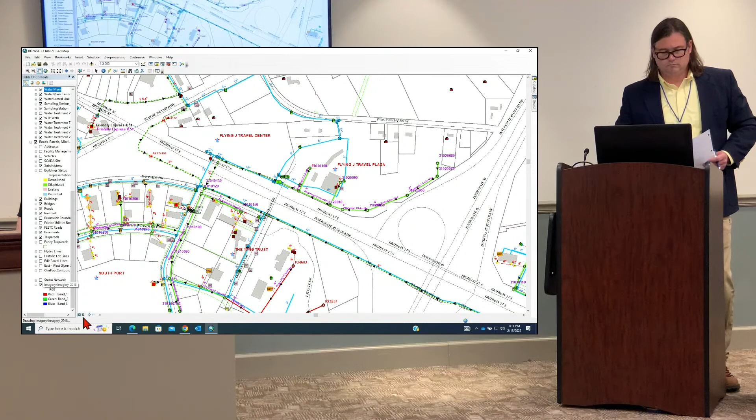The problem is, if you're familiar with that area, it is very wet right there, so they're gonna have to bring in matting and do some significant traffic control because the entrance to the Flying J is right there as well. Typically we handle these without having to bring it to you because they usually don't get above the $25,000 limit, but this one came in at $36,496.18, and that is the cost for Georgia Power to provide the new service.

Where's the pump station? Right there in the corner. Oh okay, there it is. Yeah, how's it behind the locked door? I missed that part. It's fed off of a maintenance building adjacent that is owned by Flying J.

So when the travel center was built, they ran the service from the travel center, and it does not have a dedicated line for that. It's all run through the same feed, and there's something wrong with the feeders in between the station and the travel center. And Georgia Power doesn't have an easement for that?

Where is the pump station owned by? Right there where the arrow is. See where he's doing the arrow? Yeah, zoom in.

But Georgia Power doesn't have an easement for their own lines? Georgia Power doesn't own that line. They don't, okay, that's owned by Pilot Flying J. We technically don't pay a power bill on it because it's all going through Flying J right now. Once we do this, we'll start taking over our own power bill, but we'll also have a lot more control about what we can do there, which is important.

So are we paying Flying J anything right now? Do they know that? It is what it is. This is what it is at this point.

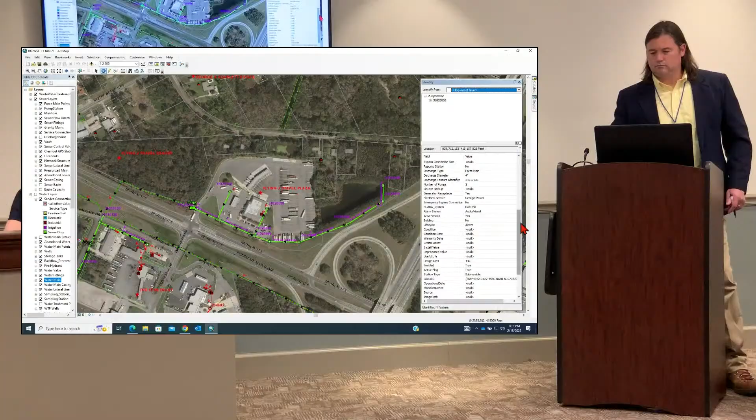You'll see that the gravity's actually been extended past Flying J, so that we could eventually one day serve those back areas if anything came in on that side. But is Flying J paying the full rate that any other person would pay? Yes, they're not getting a discount because they've got private infrastructure. They pay full amount, but basically it's only serving them right now. It has open capacity, and the gravity's already been extended so we could extend to serve more people.

This is one of the few stations we've got in our system that was actually planned for future growth. So where's the electrical line gotta come from? The other side of Highway 17, it's gonna be bored underneath right there.

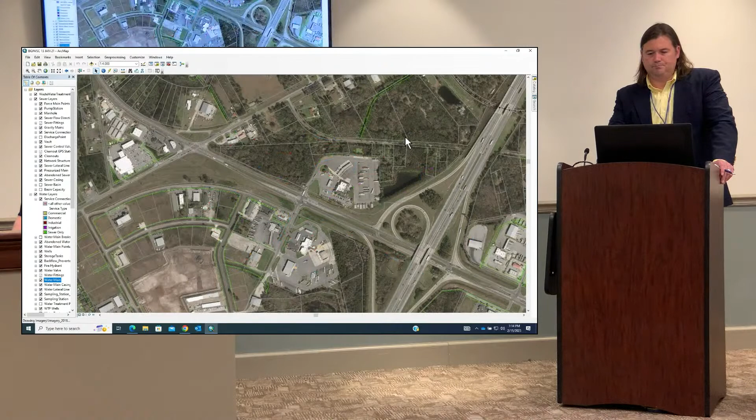A little off subject, but that green line there, that's our infrastructure. Is the dashed green line force main, the only thing in the area? There's water in there as well, he's got the water layer turned on. So all that neighborhood at the end of that gravity line, zoom out a little bit more so we can see north of there. None of that back area currently has sewer or water.

That's not a trailer park, but an RV park is back there, that's all private. The portion that's being expanded will be coming to our system, they're fixing to basically duplicate what they've got there now. Oh, I'm looking at the road wrong, I'm sorry, I'm looking at the interstate as if that's it.

It's 303 Parkway there. Got you, I'm looking at the wrong road. So the portion of the RV park that's currently not served by us, the new portion will be served. They'll go to that pump station in Majestic Oaks. I was looking at the wrong road there, I was looking at 95 as if it was Blythe Island.

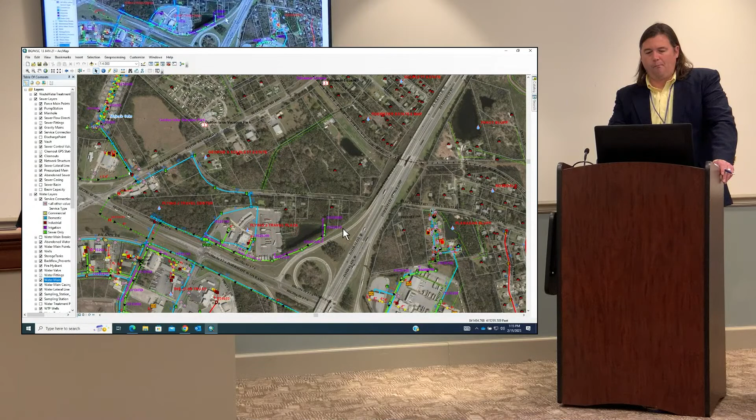Long-term, there are benefits to us extending lines onto Blythe Island, because right now that is the extent of the lines we have on Blythe Island. So we're gonna have to start paying for that? We're getting money from it, that's right.

It surprises me that Georgia Power, I understand because the way they're doing it, they say this is what the ratio costs, referring to what they believe they'd get back over time. But it seems like for public infrastructure like this, they wouldn't have a choice but to feed it, even if it's over ratio. They'll feed it, but I don't think we're generating enough usage for them there, because we do have the option of trying to fix what's already there. They already have service to the Flying J.

We could do that, but looking at it from staff's perspective, we'd rather have dedicated service. We've done several of these in the past 5 years where we have not had dedicated service, and we've changed to dedicated service. Typically it's $10,000 to $15,000 to get it done, but given the high traffic and water everything that's going in there, this one's just more expensive.

Do we have other analogous situations where the pump station is paying and it's only serving one client? Yes, well, one client is one neighborhood. And we own pump stations on the port property that's only serving the port. Are they paying the power bill for those? Each situation's different, I'm just looking at making sure we're equitable across the system.

At this point I just want to make sure we're not setting the standard that every single private pump station - it sounds like this one's already been deeded to us as a moot point, but every little residence has a little bitty pump station, we're not like, oh, we'll pay that. We typically do not accept pump stations that only serve one customer.

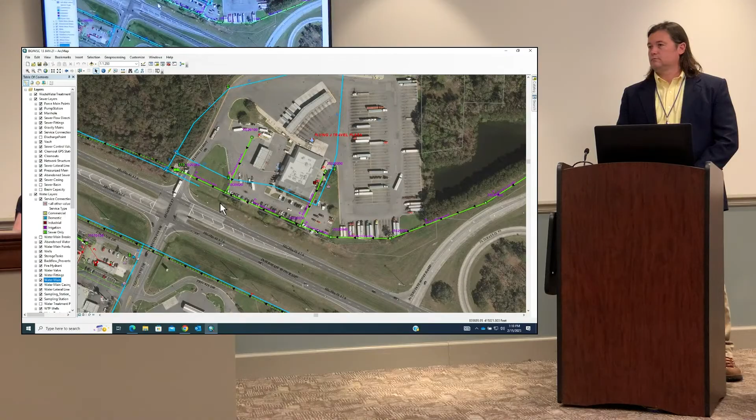Where's the breakout on the map? We don't know, we just know it's somewhere in between the station and the Flying J. Which is where? Where's the maintenance building you referred to? That's the big building. I'm not sure where their maintenance building is. Operations would know where that is. I honestly do not know where their maintenance building is. I think they have to go and check the panel and all that kind of stuff on occasion.

If it's locked, they're out of luck. We have, in storm situations before, had issues where we had to wait extended periods of time for someone to come in and open doors for us to do things. Now, luckily, that station doesn't have a ton of flow on it, so it hasn't been a problem, but it's highly inconvenient as well.

But you also could just set a disconnect on the property and that could be your isolation source, instead of having to deal with them every time. You could just put a disconnect on the property. And yes, that's one of the things, a lot of our stations, when they were constructed, do not have main disconnects at the station.

All of the stations we are rehabbing are getting main disconnects installed at the station. And I think that'd be worth going back and looking at. I mean, candidly, maybe a better use of funds is making sure that we do have main disconnects, so that our employees... because the last thing we want is have an employee who goes out there and says, I really should isolate this, but that's going to be a pain in the butt, it's going to cost money, it's going to cost time, it's going to make me late getting home.

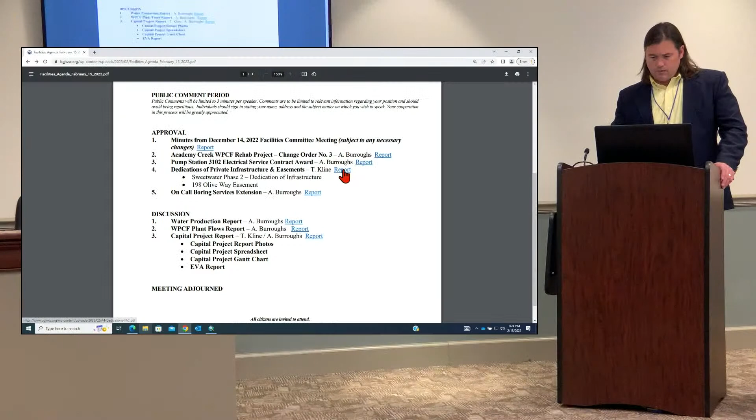Let's go to the memo here. This is the agenda item where the second, or additional, two easements were added. There's heavy graphics involved. There are two separate items to consider, and I'll walk through these two items individually here.

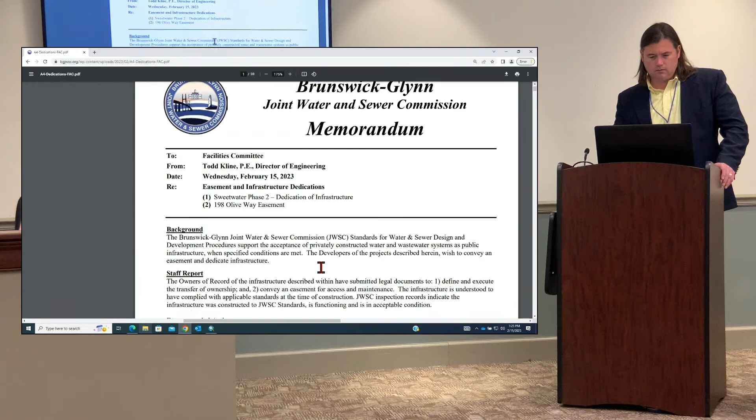First is Sweetwater Phase 2, which is dedication of infrastructure. Within the memo itself there's a location map, or vicinity map, and also a snapshot from GIS. Typically we'll highlight the areas of interest we're talking about, and the actual documents, whether dedication documents, easement plats, or record drawings, are attached as exhibits on the back side, so you should have all those materials in your packets. The first one here is Sweetwater, on the north end of Glynn County.

Zoom into that guy there.

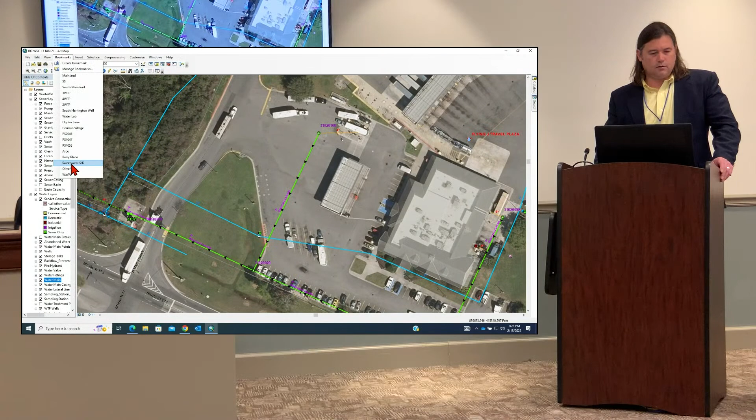Just north of the former Coastal Pines Golf Course off of Golden Isles Parkway is the subdivision of Sweetwater. They've been doing some extensions and build out of that subdivision, and as part of that, they installed a little bit of new gravity sewer.

You can see the sections highlighted on the GIS map there, and if you've got the handouts, you might have to skip around through here a little bit. This is basically a recent development - all the infrastructure's in, we've inspected it, and we're ready to turn it over. We've performed testing, manhole inspection, CCTV, the whole nine yards.

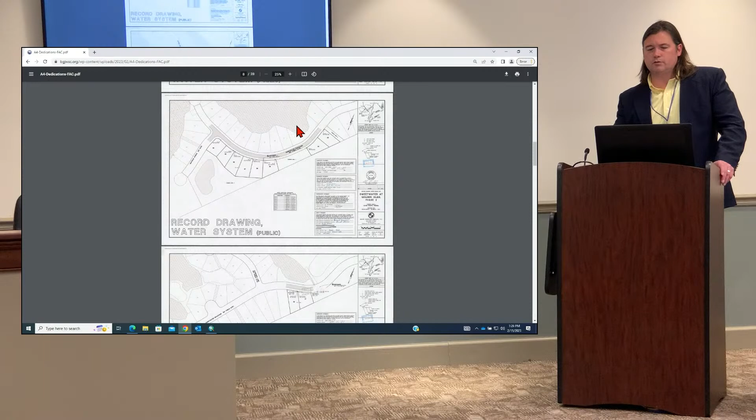Do you want to take these as one approval? One approval motion, unless there's a reason y'all don't want to approve it. Correct. Okay, alright, moving along.

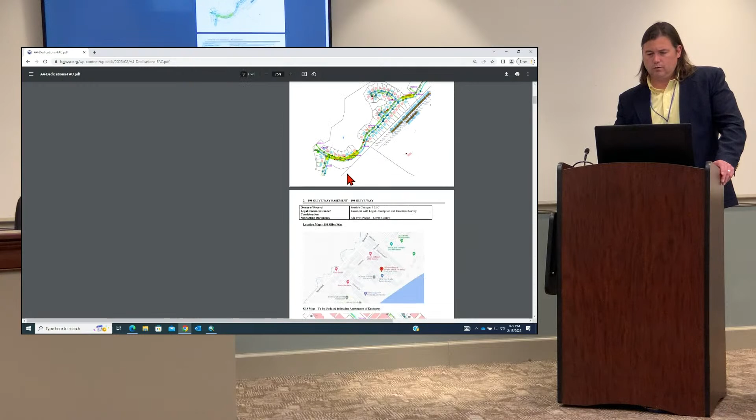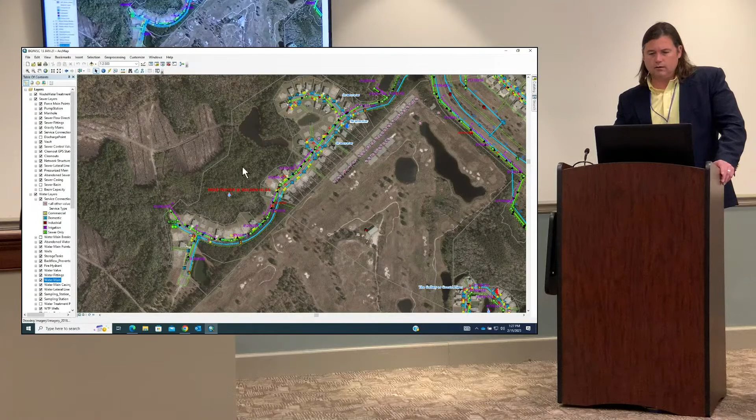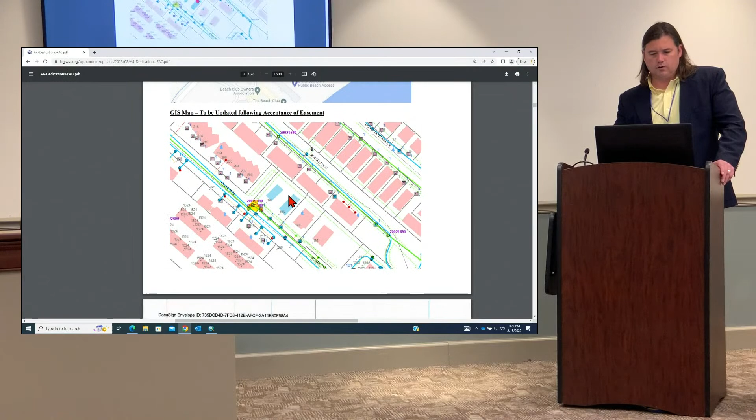The second one here is Olive Way, which had to do with an abandonment. Sometimes property owners will petition Glynn County or the city for an abandonment of public right-of-way for various reasons. In this case, the public right-of-way contained a segment of gravity sewer that we need to remain there and have access to in perpetuity. So what we requested from the applicant doing the abandonment is to dedicate a joint water and sewer easement, and that's exactly what they did.

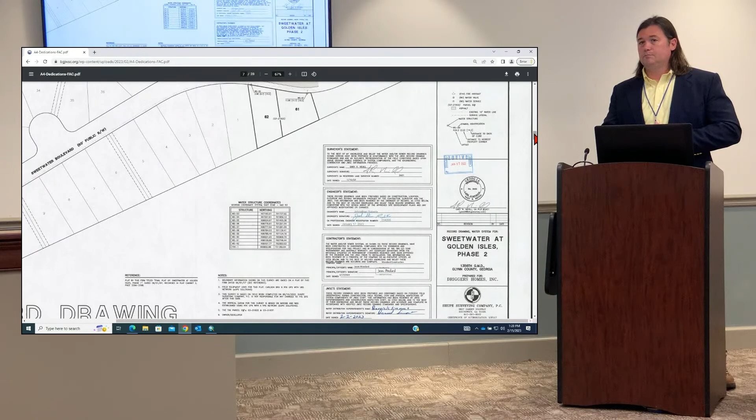So when you've got something that is public and then all of a sudden they're making it private, but we're wanting to keep a portion of it public, are we having to pay for that, or does the applicant have to pay for all of the costs associated with that? The applicant will pay for all the surveying costs, anything to do with that. Now, we will have associated legal review costs with the joint water easement, staff costs to review these applications. We've had people do abandonments and actually pay to move our asset out of their abandoned right-of-way, and that's on their dime.

I would think that we need to work with the county - if the county is abandoning property and basically just giving it away, since they're not buying it from the county, they're getting it for free, then all of a sudden Joint Water Sewer's got to pay to give somebody free land. I think we need to work with the county so that if they abandon something with our infrastructure under it, the person getting that property needs to pay all associated costs, maybe even including our fees, such as a fee to Joint Water Sewer.

We do have a review fee for it - it's nominal, I think around $100. I'm not trying to get rich off of it, I just want to make sure we're covering our costs, because ultimately it's a cost, and there's no point in the rest of the ratepayers paying for somebody else to get free land.

That is true, but legal's time could be significant, because they will review it to make sure everything's straight. We're paying Charlie's team for that. I think that needs to be part of the homeowner or property owner's responsibility. We could certainly look at our fee for what one of these abandonments costs us to review, and include an estimate of legal fees associated with that as a portion of the review fee.

Okay, that is the second one. That's my two cents. Oh yeah, sorry. Yep, okay, if we're ready, we'll move along to the next one.

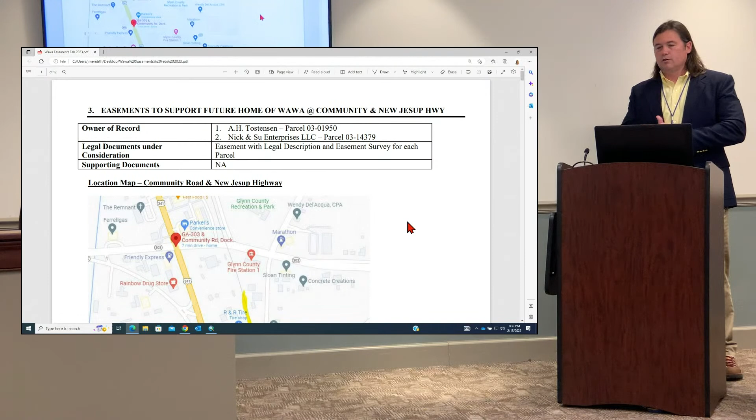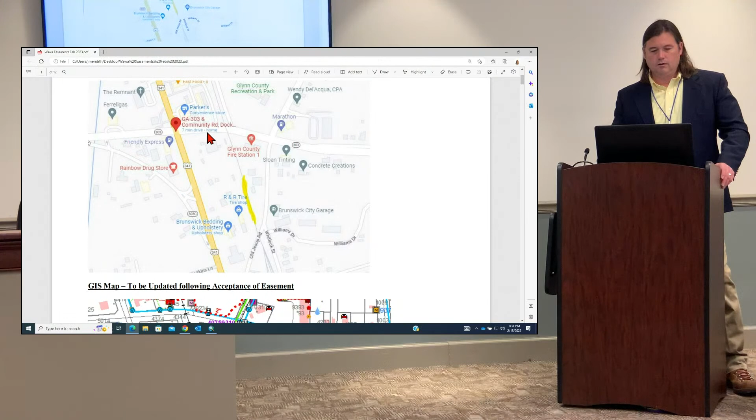They have to traverse two other properties, so they got together with those property owners and are deeding easements, or hope to deed easements, to the Joint Water Sewer Commission to facilitate that. It's at 303 and Community Road, catty corner to the old pumpkin patch. Here's a GIS map of the area where the gas station is proposed, and the easements come down the right side of the adjacent properties to get to our system to discharge at this manhole.

I'll jump over to GIS.

This is for the gravity sewer, with a force main from their pump station on site. They're going to have a privately owned and maintained grinder station to serve their facility, since gravity isn't deep enough to serve it. So their option was limited to pumping, which is how they'll convey their wastewater down the right side of their neighbor's properties.

What size is the force main? Two-inch. Anybody else ever tie into that force main? Yes, sir, absolutely. That's one of the reasons we encourage them to deed that to us. Once the force main exits their property, it becomes Joint Water Sewer Commission property, so any new customers can tie onto it. That's typically the process, and also why we are requesting the easements to be public.

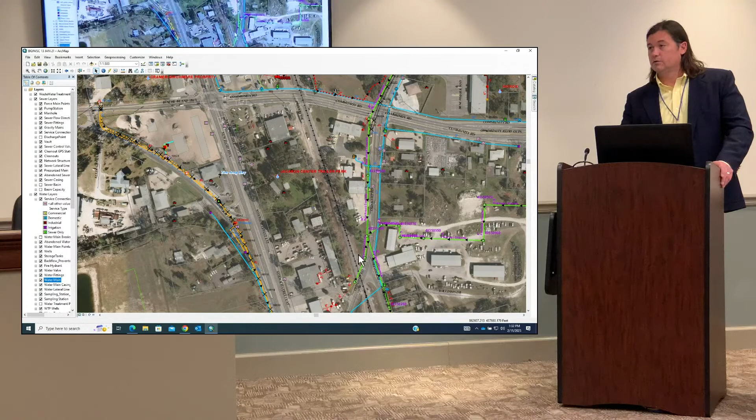We did 341 up there at Community Road and the Friendly Express. Didn't we put in a 4-inch force main then? An 8-inch, I thought... I thought it was 4-inch. No, 6 right here. I know we paid the difference to increase the size of the force main from what was necessary for the Friendly Express to tie on. That's right, we pushed it across 303, didn't we? It's across 303, yes.

Should we do the same thing here? A 2-inch line will presumably carry enough flow to accommodate whatever would be developed on these couple of lots. Zoom out.

Now, water will be brought under Community Road up here to serve this project, so there's already water right there. Go to the north. In theory, if we wanted to extend something, you would extend off of this gravity system that's already coming off of Old Jessup, that green line, and then branch off in that direction.

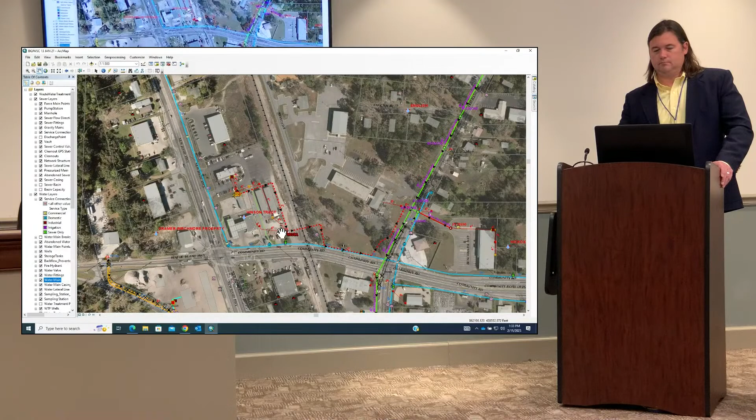So that Hardee's there, that's not a Friendly, it's Parker's, and that Parker's and the Dollar General are all on private grinder stations, pumping through that red dash line to our gravity system up there on Old Jessup across from the Ballard Center. So that Hardee's and that Parker's are grinding their own stuff and pumping it down that little section of 303 across the county's property into our system.

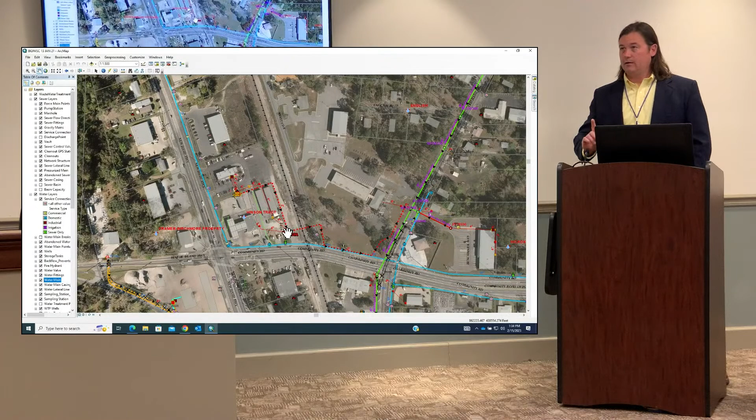Also note, we have a satellite agreement, which clarifies—by Glynn County ordinance, satellite agreements are required when there's an owner of private infrastructure that discharges to our system. Sometimes those are challenges, but we require them with every project that has associated private infrastructure, especially when it's shared amongst adjacent properties. So what's that Dollar General doing? They've got a septic tank.

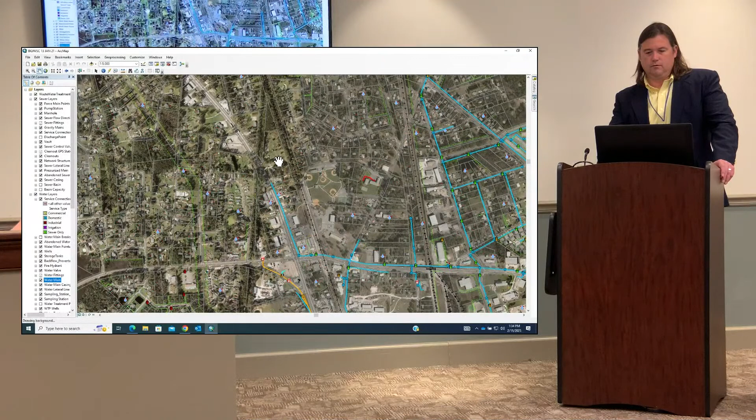What do—turn the pictures off. It looks like a red fitting. It'll look less... oh yeah, I see it now, okay, wow. That might help, all those little red things on there. Those are all septic? All these guys, okay, those are all septic tanks.

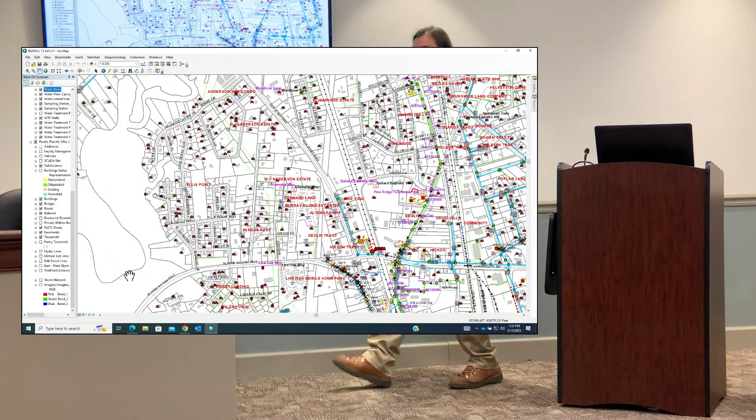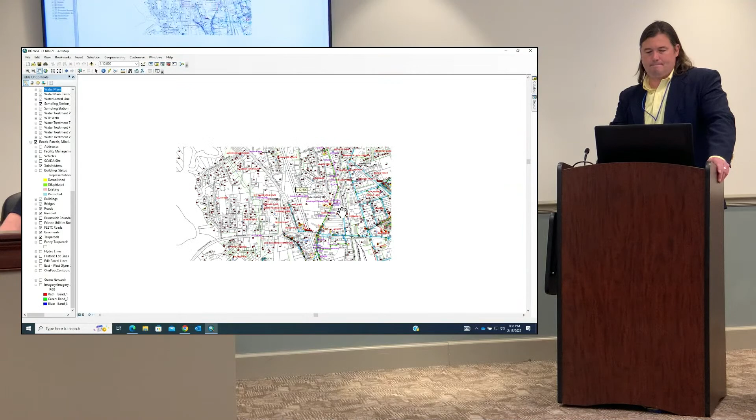That indicates it, and shows where we did the study to evaluate the feasibility of that. We had a study done right there from those neighborhoods. But it went on the other side of 341 too, a little bit, didn't it? Yeah, we did this between Old Jessup and 341 up to the canal up there, and also looked at what it would cost to do that. There's not a lot of density in there, but we also had a survey done, and there was limited interest.

And this developer is paying that portion for the easements. Except for staff review, there's a nominal fee, but that's for new business — I don't see an issue with that, totally separate from the point I was making a minute ago. In other words, there's no gain for joint water and sewer, no gain for our ratepayers, but there are additional customers and additional public health benefits.

And the line comes down south to tie in, right? Yes, we'll tie into a manhole right there near the railroad right of way. They will tie into this manhole here. Right, that all makes sense to me.

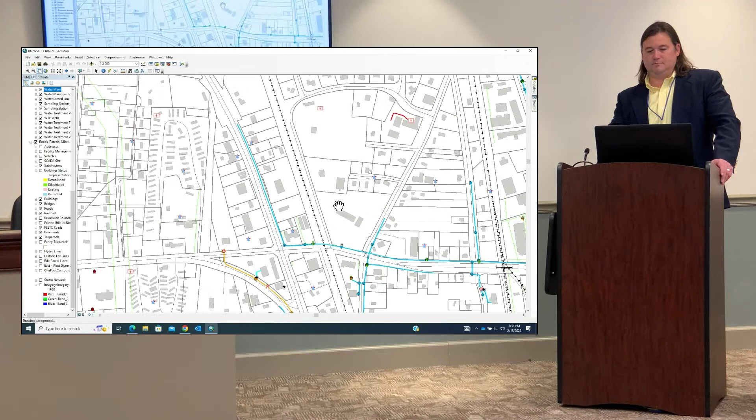Mr. Chairman, if you're ready, I'll move the facility committee recommend the full commission approve and accept these projects with associated dedicated easements, unless another commissioner wants to pull one of the three projects out. I'll second the motion. There's a motion and second. All in favor? Motion carries 3-0. Thank you.

Next item is on-call boring services extension. Mr. Burris — yes sir, back in August we were granted approval for a contract award to DNC Directional Boring LLC for on-call boring services for water main installations. That was in effect for six months as a trial period to see how it goes. We're at the end of that six-month period, and both parties are very pleased with the success of the project to date. DNC has agreed to hold their pricing where it's been for the past six months and extend this for an additional six-month period. The request today is simply to extend the existing contract six more months.

We've used this to do a lot of work in St. Clair subdivision on the island, Menendez and Rivera — El Dorado — another subdivision on the island, and some work on the mainland in smaller sections. Instead of having to open-cut and dig all these two-inch galvanized lines, most of what we have bored is two-inch lines. We're also going to use this contract, already awarded, to replace the lines in Wesley Oak Circle, a neighborhood on St. Simons, up to eight-inch lines in a couple of those areas. So this is a very effective tool for us, and we'd like to extend it six more months.

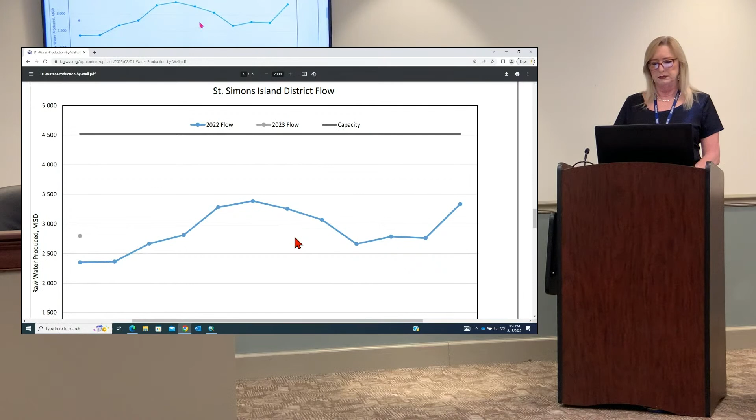But one thing to note, if you look at the graph, last year in January versus this year, we have substantially more water usage in the month of January for St. Simons, 2023 versus 2022. We have seen some customer growth over there, but not enough to explain that big of a difference in water usage. And this is measured at the well sites, not the meter sites, so I'm a little curious if we might have had a metering issue back last January for the number to be that low.

And then at exit 29 at the South Mainland, there's 3 wells down there. Commissioner Stevens, like we said on the Canal Road well, exit 29 well is the same situation. It is not a current production facility. There's a SPLOST project that will convert that into a production facility. But it was 275,000 gallons a day at exit 29 for the month of January, very much in line with where we are month to month down there.

But when we convert these from fire wells to regular wells, are we using like the Ridgewood model kind of thing? Yeah, I mean, with every project, you learn new things that you want to change. So Ridgewood is kind of what we're basing it off of, with some tweaks that we think might need to happen with maybe the way the building and piping is being laid out. But yes, very similar to what we've done in the other areas. It's an attractive facility, and all the operations staff like having the same thing in every place because it makes their life easier as well.

What's the status of the plans on the Canal Road well? We're going to touch on that in the report as well, Commissioner. We're waiting on a couple things before we advertise, the final opinion of costs from the engineer, and then also I believe we're still waiting on the EPD to come back.

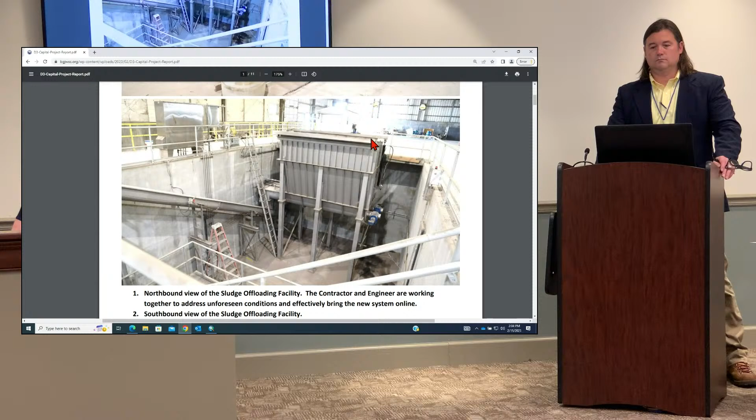No, that hasn't been started up yet. So nothing's been started up there. Right, so the lid, what's been the major holdup was that this lid up here, which technically wasn't required by the contract, but they decided they were going to put it in force anyway. So that lid was not able to function as intended, so they were bringing in additional hydraulic rams to extend it out further.

Well, the first time they sent 2 hydraulic rams down here, they sent them with different stroke lengths, and you can't open a lid in the same direction if they don't extend the same stroke length. So they brought in and got some new ones installed, tried to do startup last week, having some issues they're trying to work through now. I was hoping to report today that that had been started up. It will work in manual, it will not work in automatic right now, so we're working through those issues.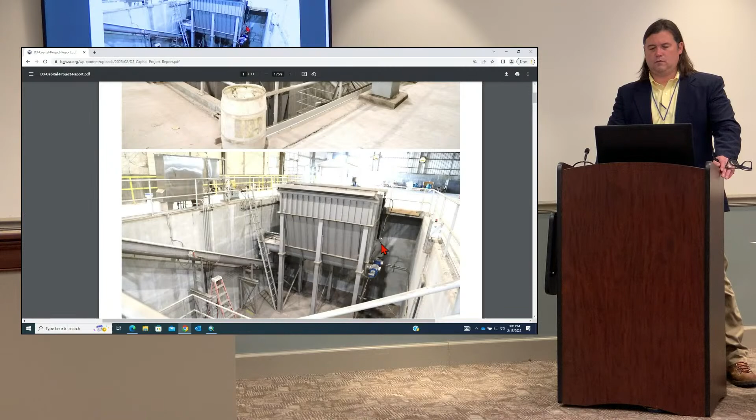But we did take a dump truck that we have, threw some sludge in there just to be safe, and it will run in manual right now.

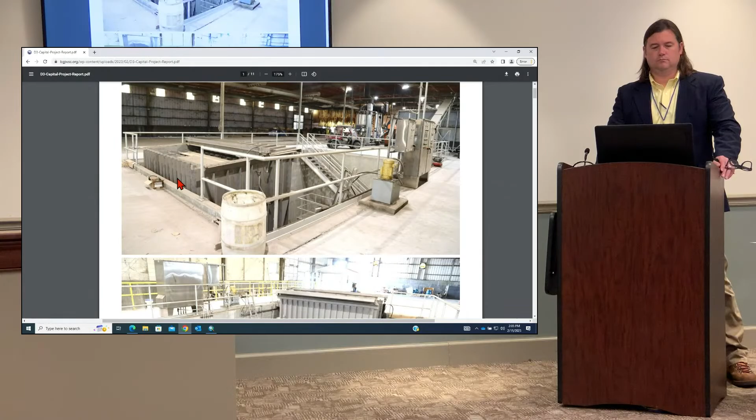Does there need to be a chain or some kind of additional protection around the left side of the plant, west side of the? That's all gonna be redone. That thing's got to be lowered, that whole thing's gotta be redone from a design perspective. Looks like there's a gap there, somebody will walk. There is, and that will be corrected as part of the design changes. That'll have to be paid for by the design professional.

Maybe just a plastic yellow chain. Yeah, we'll put something up there. Yes.

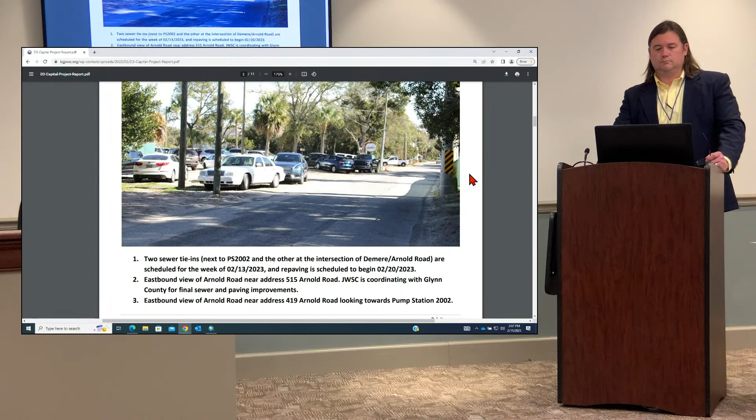Okay, next project is the Arco Area Water and Sewer Extension Project. I would say we're over 30% complete with that project now.

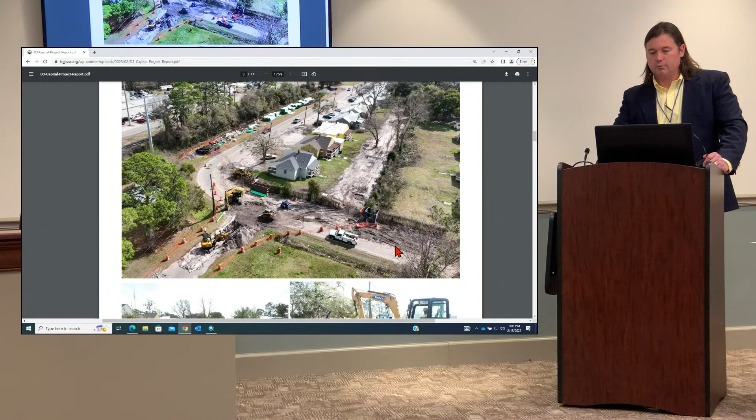So it's a fantastic opportunity for these folks. And then also on the other side, these folks will be connecting as well, just outside of the picture. And we're finding a lot of interest about the septic tanks, right? Yes, sir, we are. I think the septic systems in that area had served their time and were very tired, so it's a timely connection to the public system. This exhibits the contractor a little bit further along than this picture from when it was taken, which you can see some activity going on there, a lot of hands on deck with UWS, our prime contractor.

Bottom picture shows another shot up the easement behind the homes there, and some pipe going into the ground. Pretty typical of what you see on site.

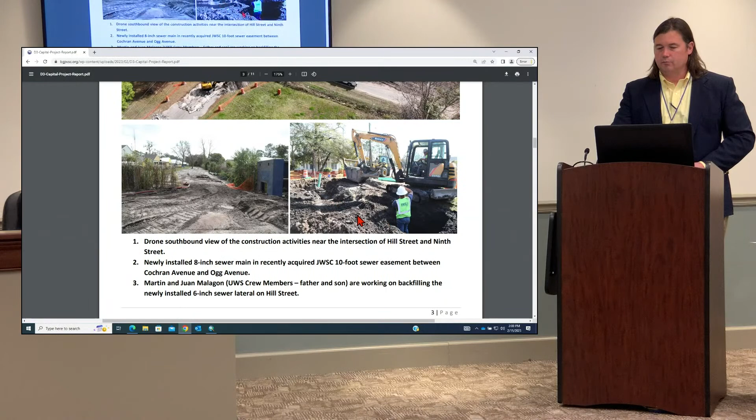What percent are we through on that? I would estimate 30 to 35%.

It's a little bit more than we have listed up here on the title bar. We got some renewed production going on now after the first year. In fact, right now on site they're having their bi-weekly project meeting between the engineer of record, our staff, and the contractor. That's 2 o'clock every other Wednesday.

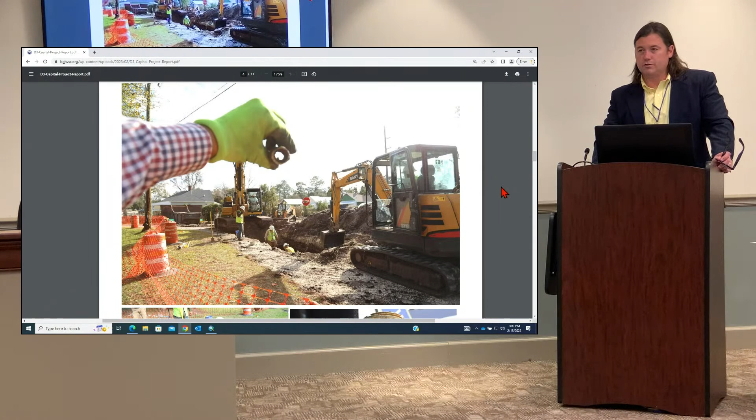Galvanized replacements, ongoing project here with in-house forces and that horizontal drilling contract, which candidly from operations, they really enjoy having that tool at their disposal.

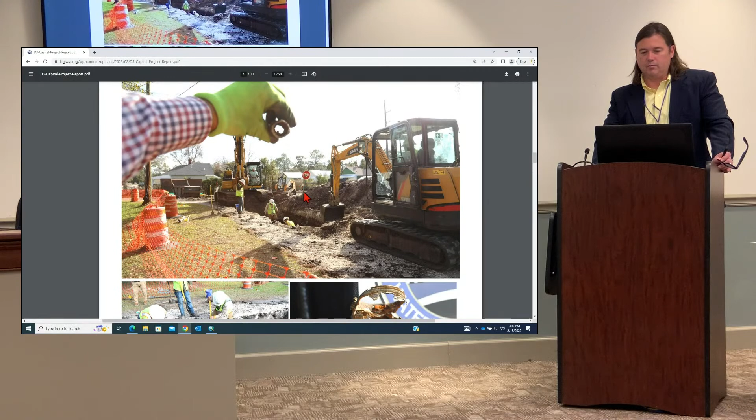So you can see here, this is Jason taking a picture of his hand, holding a piece of galvanized pipe here that exhibits why it needs to be replaced. Tuberculation, you can kind of see in there. Down the bottom two shots, you see the guys in action doing a repair, with the new poly tubing going in for a service line. That's the blue 1-inch poly tubing. And that bottom right picture shows a typical piece of metallic coming out of the ground.

That's amazing. It's something else. You can see how thin that is. That was just a galvanized nipple there.

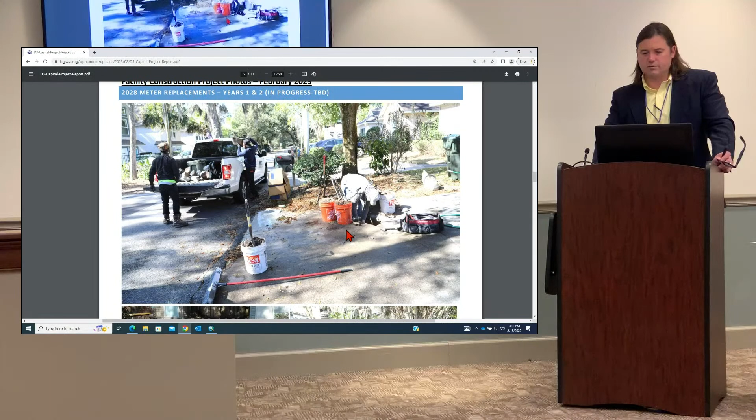Moving along, meter replacements. In progress still, and I think around 19,000 plus meters. Is that correct?

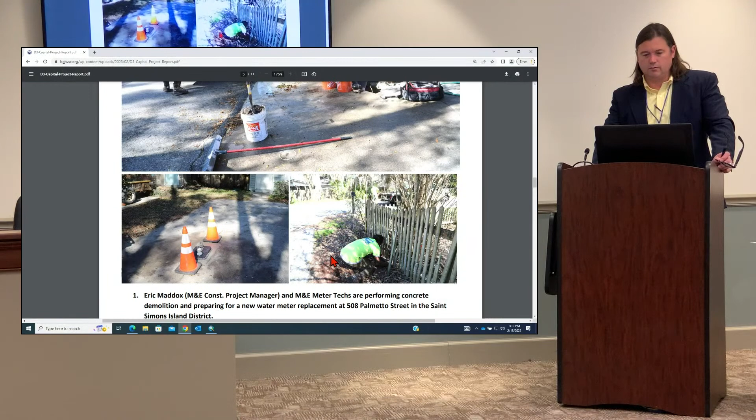Some good pictures of the M&E folks in action, and it's pretty impressive how fast they move with these swap outs. They have a system down: pull the lids, drill them, put the new antennas in there, and get them reinstalled back in service quickly.

Do we have enough meters to complete the project from what we've already received? Yes, sir.

I know we got them early because the price was going up. What's the value on those? Are we able to flip them? Any extras we could sell off? No, no extras. I know a guy. Know a guy.

Very quick moving project there. I'll just note, for every new meter that goes in the ground, we're working with M&E to take survey grade GPS shots of those meters. So with every new meter that goes in the ground, our mapping gets improved, which helps when we have to go out and locate a meter.

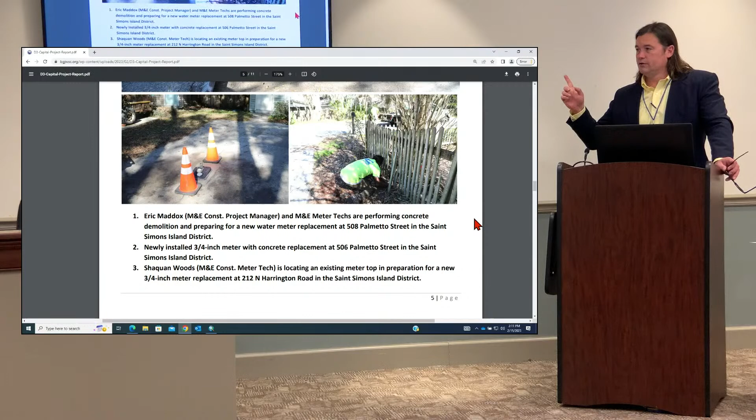Did we find that meter in the marsh yet? We've got several we're showing in the marsh. They previously had them GPS'd, did a drive-by GPS type thing, and tried to pick up the meters, and one of them apparently is floating out there in the marsh. Obviously there's no meter in the marsh, but there's a point out there.

Is this project going to come in under budget? That's the hope, yes, sir. We still have about another 8 to 10 months worth of field installations though, so we'll keep our fingers crossed and certainly stay cognizant of that question.

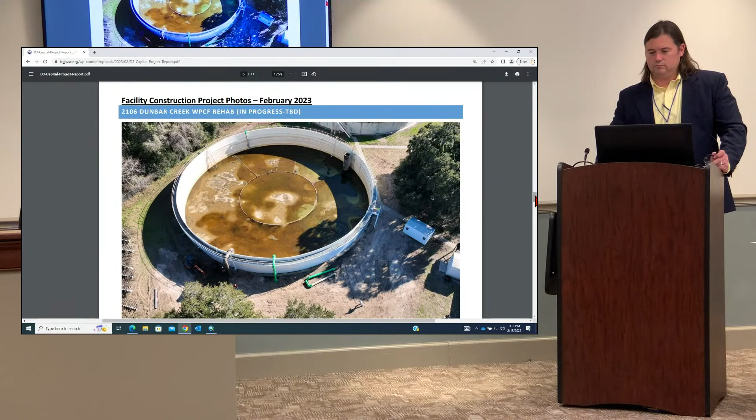Dunbar Creek Water Pollution Control Facility. So Dunbar Creek, the contractor has remobilized. We've been waiting on some materials for a while. What you see in the photos is installation of new RAS piping and aeration piping being relocated for the new diffusers, which are set to be delivered end of this month.

That tank has been painted, sealed, the whole 9 yards, and we replaced a few sections of grating in there. We're anxiously waiting on those diffusers to be installed so we can get that tank back online and take the other one offline.

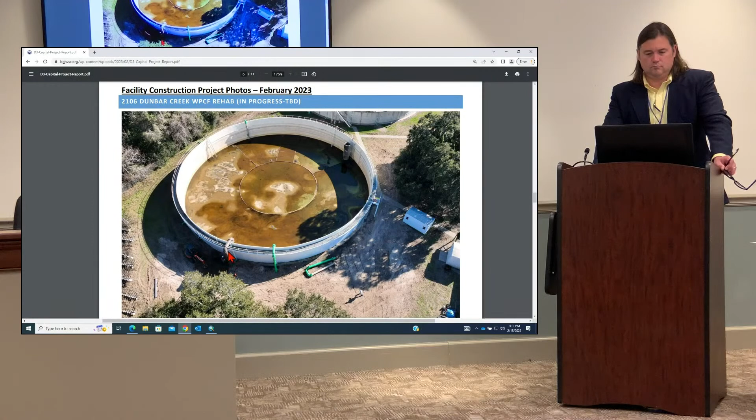The green lines you see coming up there, that's an air line. There'll be one on either side - you see there's one on the other side, so there'll be two air lines coming in. The brown line adjacent to that is the RAS line coming in, and the piping they're installing in the pictures below will tie into that RAS line.

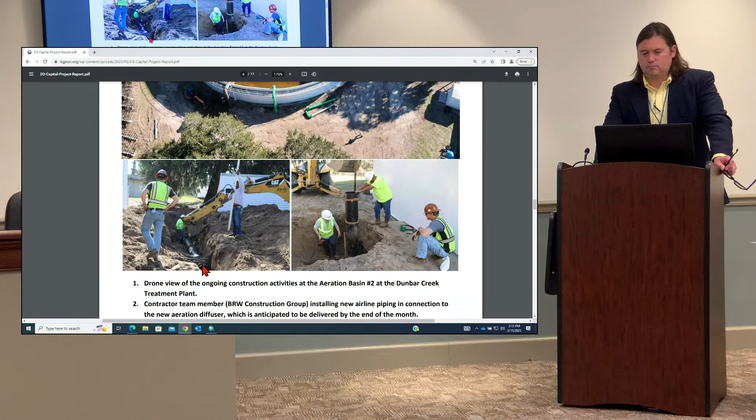So we'll have dedicated RAS feeds. Right now they all come into the same pipe and then split off, so you don't really have control over the RAS going into the individual basins. We're going to have dedicated lines so that we can modulate that flow as necessary.

But go to GIS on Dunbar Creek. Yep.

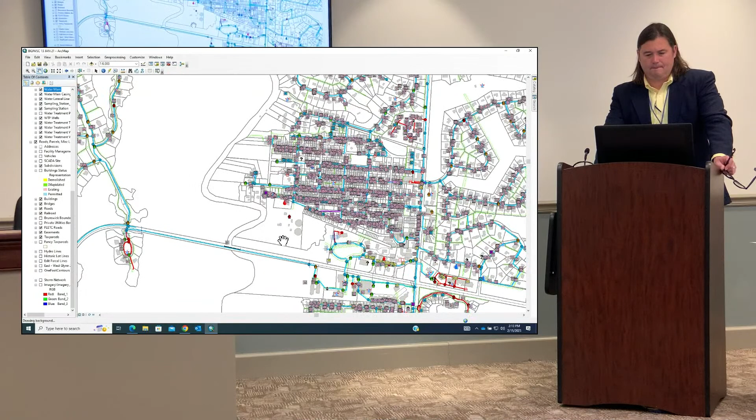As the chairman gave us a preview of earlier, we will be having a new change order on this project. I am waiting on pricing, it is being fixed now before we get the pricing, because we have a huge sinkhole that has opened up on St. Simons, on that plant. Let me just come up there rather than trying to explain this.

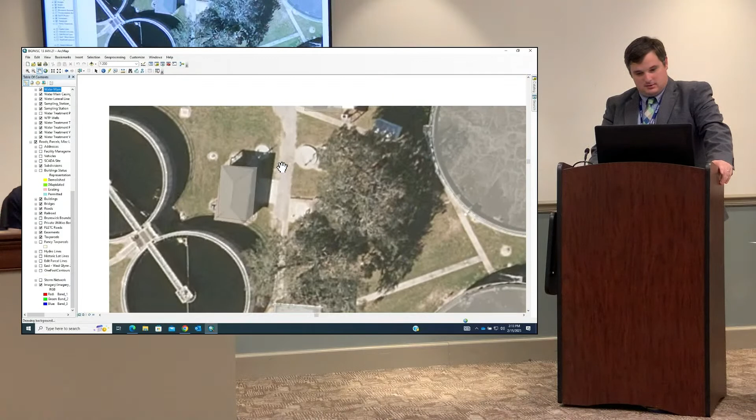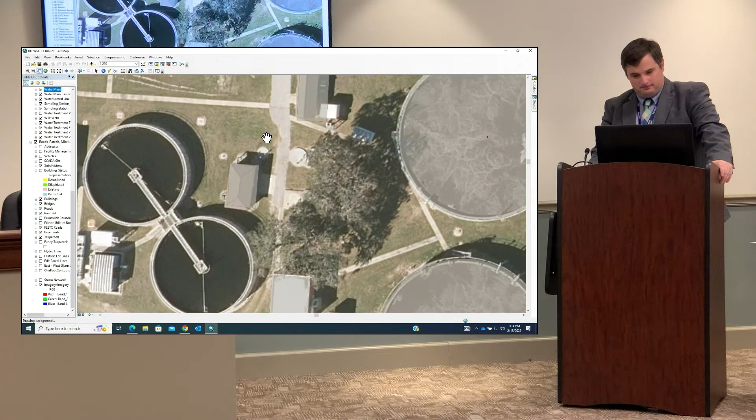All right, if you recall, early on in this project, this line right here, between this wet well and this wet well, collapsed, and it's been replaced. This line here, this 30-inch line, has now collapsed as well.

It collapsed the middle of last week, and then in the rain event this weekend, it swallowed a whole lot of dirt. There are 2 big sinkholes out there, and that line's 15 foot deep. The contractor estimated they'd had to bring in 14 dump truckloads of dirt to fill it in.

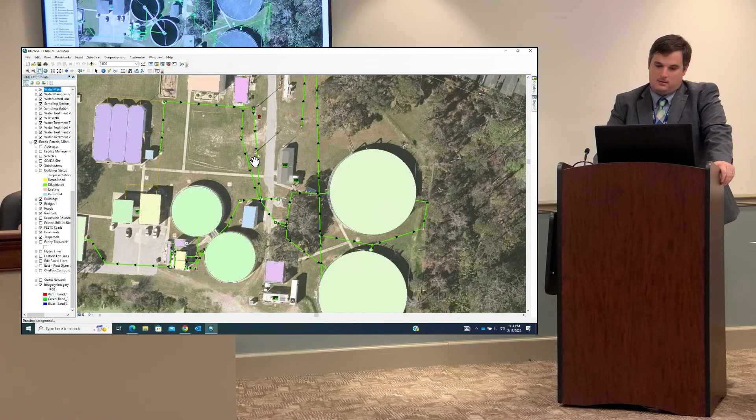Let's zoom that out a little bit, Andrew. So how big is this 30-inch line? Can you show the entrance road? 30 inch, yeah, that's what I thought. Let's talk about the entrance road while you're talking about this too.

Okay, so first thing on the change order we're looking at doing: this section has collapsed down here, so this is going to have to be replaced. My recommendation, and what they're ordering pipe for right now, is to replace from this manhole right here all the way back to this box. If this line's already failed and this line's already failed, the rest of that line's not in good enough shape to keep in service, and it could fail and create issues with the line we just put in. Exactly, so we're just going to replace this whole line.

Pipe is supposed to be here this week, or first of next week. Right now it's on bypass. And it's 15 foot deep. Well, right now it's not 15 foot deep because there's no dirt on top of it. When you replace it, you've got to put in trench dewatering, dewatering boxes, everything.

So to give you an estimate, this 30-inch line from here to here cost us $100,000. So it's not going to be linear, obviously, but it's not going to be a small change order when we bring it in here. Hoping to have that to you next month.

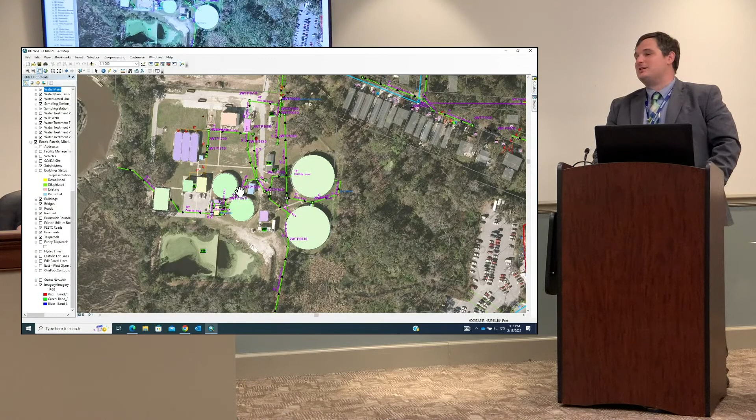Now, entrance road, as the chairman was talking about. Okay, we talked about needing to add, let me turn this off because it's getting in the way, an additional clarifier. These are clarifiers. To get to 5 MGD, we would need to add a third clarifier. The most logical location to put that is right here.

Right now there's filters and UV, which, as part of and already funded in the project, are being relocated down here. So to put in a full-width clarifier like these two, and as part of the contract we've got awarded, this roadway coming in will become the main entrance into the plant.

Because currently the main entrance to the plant goes through the Glynn Haven neighborhood, and we're trying to get out of having to drive through Glynn Haven. It's very crowded. We want to be out of that residential area as best we can. We'll still have a temporary route we can use, but that's not going to be the main entrance once this is done. But to put in an 80-foot diameter clarifier here, we're going to need to swing the road out further this way, and you'll notice there are ponds here.

Is that what that is there? These are ponds, yes. Is it a natural pond or is it man-made? There were ponds that were part of the original treatment plant that was there, so we own the ponds. We're going to... Wetlands then, it's man-made. It's man-made, yes, this is wetlands.

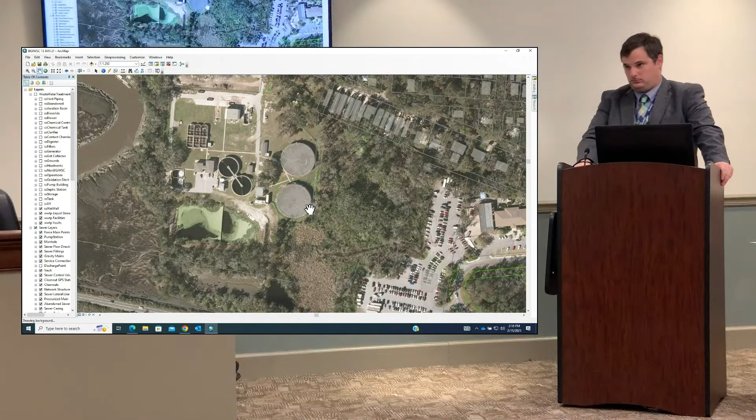That's all wetlands too. Can you click back there on it? Don't worry about it. Let me see. That's fine, nothing to worry about. I can get there. I thought you were on the GIS. I was, but that one doesn't have the owners. Yeah, I'm with you, you don't have to do that, Andrew. Hang on, it'll take 2 seconds.

If I could zoom in or zoom out the right direction, we'd be a lot quicker. And tell us what the price of the clarifier is, Andrew. $4 million.

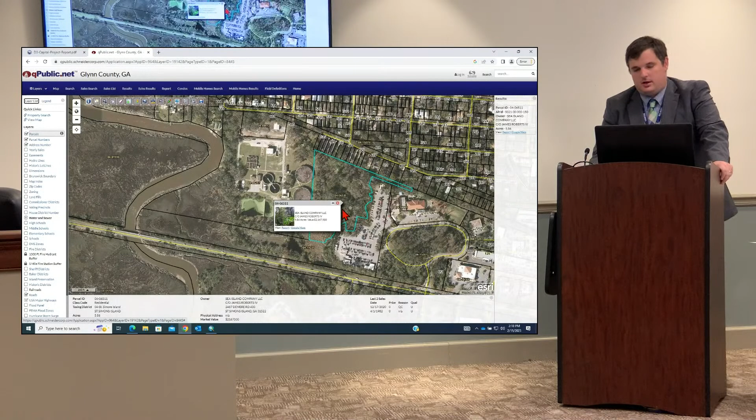That would increase the capacity from 4 to 5. The aeration improvements we're putting in, we're replacing the diffusers in these aeration basins because they need to be replaced anyway. But we're putting in the aeration capacity for 5 million gallons because if we're going to replace it, we might as well go ahead and do that. The filters and the UV system being installed will have the hydraulic and treatment capacity for 5 million gallons a day. So we're already putting all that stuff in. The only additional thing that would have to be put in if we got to 5 is that clarifier.

And this is paid for out of the $15 million bond issue. Yes, this is paid for out of the bond issuance.

So the burning question is, should we make the road cut off, fill in more of the pond and make the road go there for that road? Well, that's the thing. It would be prudent to do that, because whenever you wanted to put the clarifier in, you're good to go. Where it's done now, if we decided 5 years from now to put that clarifier in, you're gonna have to redo the roadway at that point.

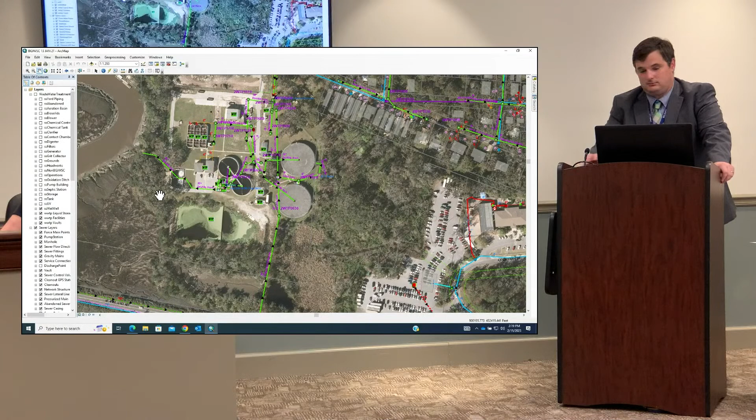Can you zoom on in? Yeah, I know, sorry, I always zoom out first. But yes, it just seems like there's, even with that round thing there, it seems like there'd be room for the road.

Hang on, where's the drawing thing at? It'd probably be scraping the side of it on the way by. I mean, it's only one lane, it only gotta be one lane traffic. It's 2-lane traffic, if it's the main entrance. Can you draw a circle in there, Andrew? I'm trying not to figure two lanes at one time, I'm saying.

We're planning for a 16-foot roadway. Which is not a wide road. Not a wide road at all. Not considering you're gonna have a lot of trucks coming in there. I'm just looking at the scale of those two vehicles right there. We definitely need to pave that road. Oh yeah, I agree with that 100%. I drove down it today.

I just wondered if we truly had to get into the pond, or the room for that. So there'd be additional cost to fill in more of the pond and move the road, filling a portion of the pond.

How do I draw it? It's been a minute, how do I draw a circle on here? It's been a minute, I only know to do it if you go to layouts.

Well, that's a pretty good guess right there by me. I was saying, that was pretty good, first time out. Pretty lucky. All right, I'm going to call that skill, even though it clearly was not.

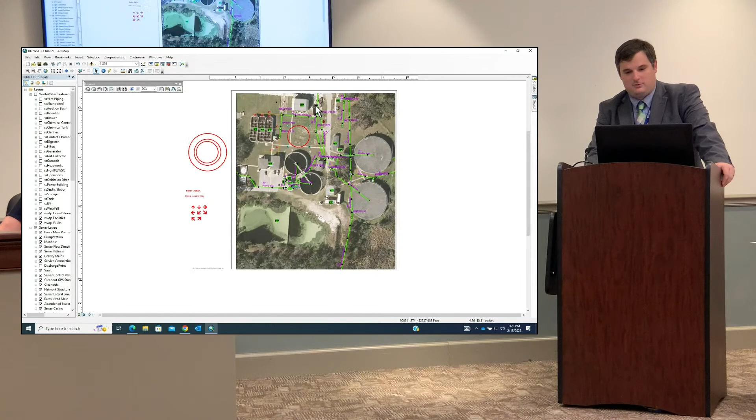The other thing at the headworks, show them where the electric headworks is, Andrew. Oh, okay, headworks is right here. And right now we're having issues there because the bypass pumps are not able to keep up.

And so we're backing up into the equipment right there. At high flows, it'll fill in this a little bit. It's not causing major problems, but it will require some work once we get it done.

They're bringing in, we got 2 6-inch pumps there now because that's what we had on hand. They're bringing in a 12-inch pump and a backup, which should correct that issue.

And we're gonna have odor control at that headworks. Yes, this will be covered like the one at Academy Creek is. There will be an odor control unit, I believe, sitting right here.

And then one thing we're going to do, which I'm hoping will be successful, honestly. If you've ever been by this manhole right here, occasionally you will smell something at that manhole. We're going to run odor control piping from this unit all the way out here and draft air out of that manhole. So we're putting in an oversized odor control unit to pull from that far.

To put in that clarifier is not gonna be any cheaper than it is today. You are 100% correct. I'd like for us to figure out a way to put that clarifier in, and I agree.

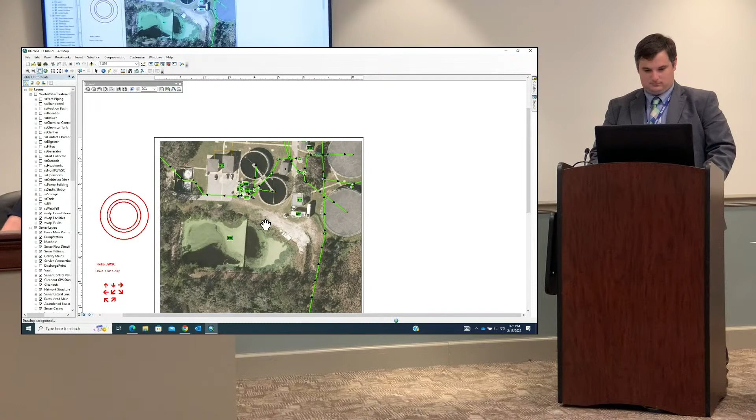So when we're putting the road in, are we gonna put an accel lane in? Not required. I know it's not required, but even if it's not required, I...

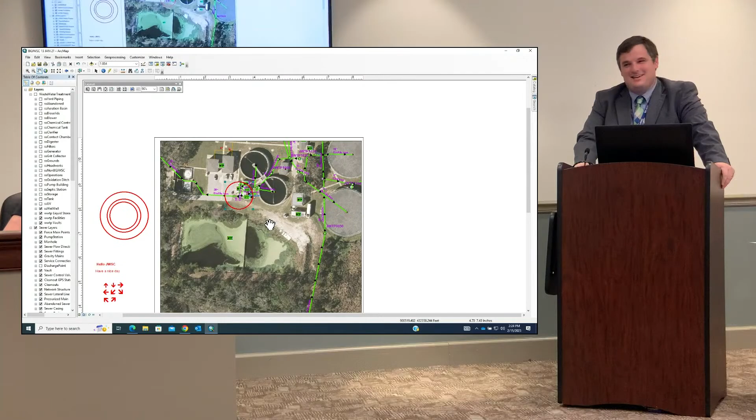I travel that road a lot and it is. I got that in writing. I'm just thinking for our trucks to be able to get out. I mean, that is what we've agreed to do, and it's a high-speed, very busy road.

In lieu of putting an accel and decel lane in or anything like that, we will not be pulling our equipment out, passenger vehicles, but not our sludge truck or any equipment, out of there between 6 and 8 in the morning and between 4 and 6 in the afternoon.

So we'll come out at theoretically lower traffic times. Theoretically, yeah. I mean, I can see, you know, again, not doing a decel lane, but the accel lane, I'm just thinking that is a sharp turn for a big truck loaded down with stuff on a very high-speed road that is back to back to back traffic. You're never gonna have that large gap in traffic, right there, I shouldn't say.

Well, we come in and out of there now already as is with that sludge truck. It's not ideal because it's not paved, but we do come out of there now to avoid having to go through the neighborhood.

Would y'all agree we need to see how we can finance that? Absolutely, I agree. Yeah, I think we need to plan for the road too, for the future here. It makes sense to me to have an accel lane too, I understand that. We can look at what that would add to it, sure.

Now, Glynn County is fixing to do some stormwater work down here. That has nothing to do with our project, but will add a layer of complexity to our project.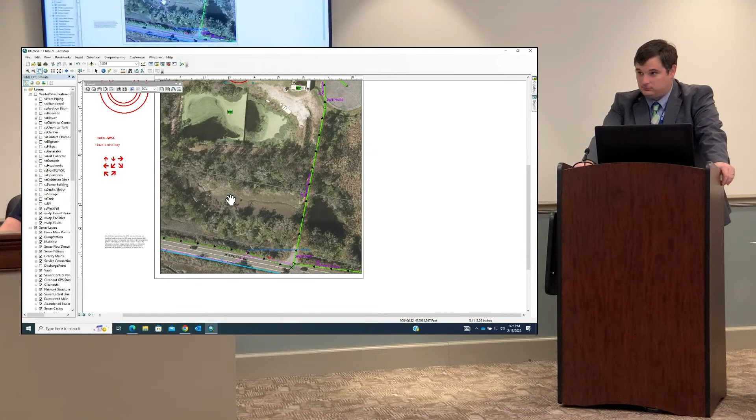And we've already purchased all the equipment for this project. The filters are coming in March, not the UV. I had it backwards - filters in March, UV in May.

And the tank you see right here is the one that was repainted. That's steel, that's correct.

Drew, I know we use a lot of bypass pumps. Did we ever do the analysis to see what it costs us to own those versus renting them every time we need them? The two that are currently sitting there now at Dunbar, we own.

Those are ones we just have, in general though. In general, we have not had a project bid since we had that discussion that included extensive bypass. That's something we just talked about last time - we looked at having the contractor provide bypass during that time frame, and it was a pretty extensive cost. I realize there's some labor associated with that, et cetera, but we might could take, over the course of 2 projects, and buy a bypass, let the capital pay for them, and then at the end of those 2 projects we end up with an additional bypass pump. Now, we don't own any portable 12-inch pumps, because that's just not a flow rate we're typically gonna need to bypass.

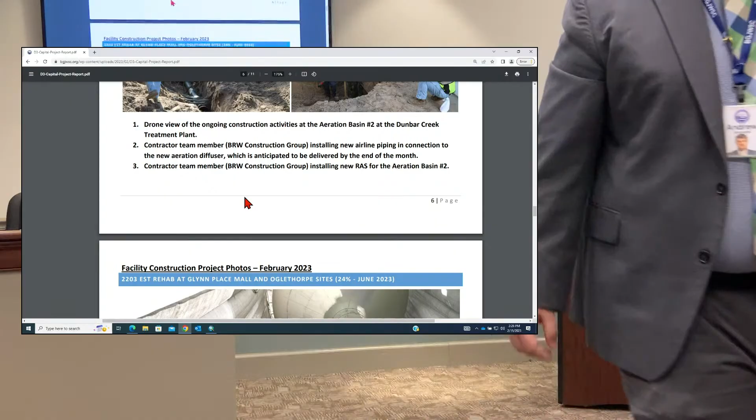So the 12-inch they're bringing in for this project, that will be rented because of the size. It's still worth running the cost - the ROI is 5 months of rent, and you're going to end up having 5 or 6 plus, so you might end up being better off buying.

Now, the contractor said he would have that pipe installed in a week. I think that's probably aggressive - I think you're probably looking closer to 2 or 3 weeks to get that done. But then we'll be off bypass for that one. My only point is, we ought to look at it, look at options of buying versus renting, because sometimes it's better to buy something than to rent.

So with the replacement of this line that just collapsed, is it gonna be a contractor, we're not gonna do anything in-house? Contractor's gonna do that one. Because with the other one we did in-house, is that correct? No, the contractor did that one too - same contractor we have under contract, already on site. It's design-build, that's fine. So you get a price from them since they're already on site - they don't have to mobilize, they're there.

Okay, the small sinkhole started like Wednesday or Thursday of last week. We started talking about bringing in bypass and dewatering and seeing if we could replace one section in the line, the rest of it. Then Sunday morning at 3 o'clock, I got the phone call that they found that. Literally couldn't get through one weekend - we were trying to get everything set up.

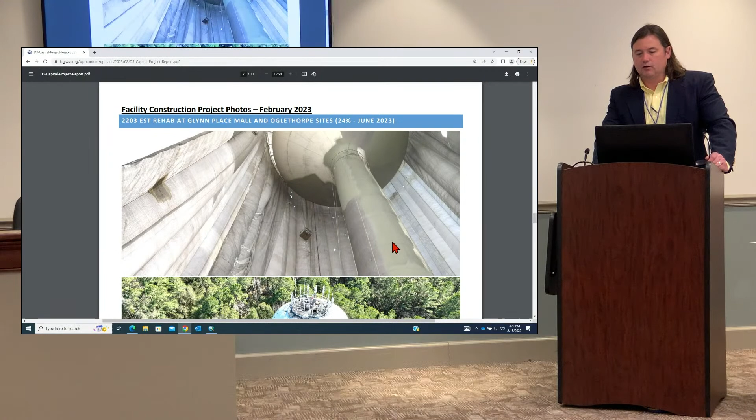Up off of Frederica. So you can look right here - if you drive out there, you've probably seen it, and you may have never even noticed that tank, but now you surely will because it's got a skirt around it. That's a containment wall, it's fabric that they hang with cables, and that keeps all the abrasive contained. It's called Black Beauty - a silica-free abrasive they use to blast down to white metal, clean metal, and then repaint and prime. So that grayish, greenish look right there is the primer coat they go back on, and they're doing it immediately after they blast that tank.

So the inside is done pretty much in the same fashion - that's what you see there, the final coat. You don't have to put the containment for the inside - correct, it's self-contained on the inside. So, good shot there of the Oglethorpe tank.

That one's well due for rehab and painting. You can see some discoloration on the side of the tank, that's from a resident osprey that builds a nest here annually. They take off and move elsewhere in September, so the osprey isn't there right now.

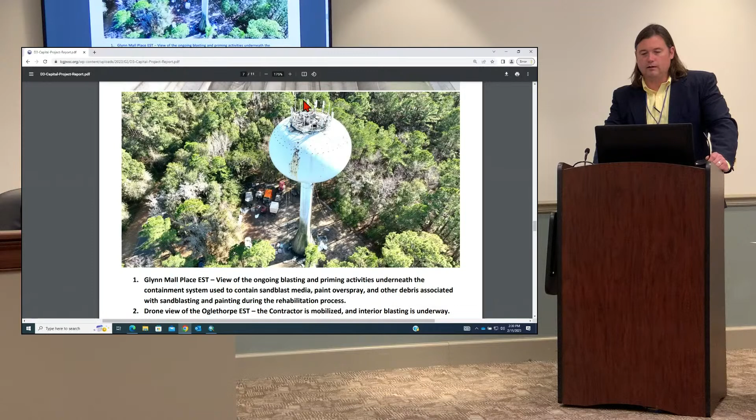We're rehabbing its home while it's away. They're inside doing a lot of the internal rehab, replacing ladders, structural stuff, blasting, etc. And AT&T, you see all this corral of antennas up here. AT&T leases the space from us and pays a fee through contract. They're disconnecting all their stuff, and they call it a COW.

It's a temporary portable antenna they're going to put up next door, and they're actually going through agreements with the Baptist church next door to use their property to do that. That takes all the big cables and whatnot out of the center, lets our guys go in there and do what they need to do. They're taking out these big bundles of cables, and it's only going to be about 3 cables or conduits going up at this point. The technology's changed, so it's not quite those conduits or relics anymore.

But it's pretty fantastic to see. A lot of respect for those folks that climb those tanks and do that work.

What do we get paid a month for leasing that to AT&T? We get about $330,000 a year, so about $28,000 a month. Not from that one, but system-wide it's $330,000 a year, and that has been steadily increasing as more carriers have attached to our units.

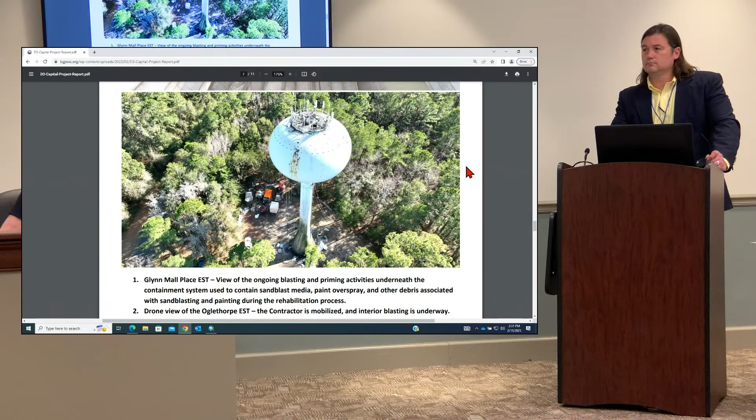And they're responsible for all the maintenance? Yeah, we don't do replacement or anything, we're not involved in it. This is a good example of that. When we have to rehab a tank, it's in the contracts for them to accommodate that rehab. So it's no cost to Joint Water for them to remove their stuff and temporarily get out of the way for us to do our work. We work closely with them so we're not unduly interrupting their services. It may also be an opportunity for them to upgrade some of their equipment, and that's exactly what they're doing in this situation, putting in some newer stuff. So it works out well.

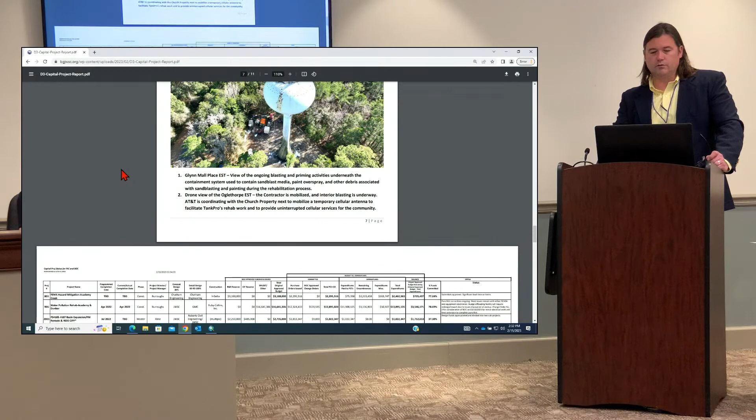Commissioner Stevens, this may be your first time seeing this one here, being in facilities. So what we also include in the picture report, or capital project report, is a spreadsheet of all the ongoing projects. You'll notice several more projects listed here that are in different stages of motion that don't show up on the picture report. The picture report is stuff underway in construction, so if there's not much to see, it's just in design, it's still included in this comprehensive list.

So there's a lot of numbers in there, different costs and change orders associated and whatnot. At the very end, we estimate a percentage completion, and the status notes on the very right give a short synopsis of where the project stands.

Could you start color coding this to show something as far as 60 or 70% complete or under construction? Sure, certainly, we can break that down into a color schematic. This is pretty busy, a lot of information. That's why we normally leave it for if there's any questions for the commissioners to ask. We don't normally walk through this one, but we can certainly answer questions.

Just a thought, and again this is my first time looking at it in depth, I've seen it before informationally, but it might make sense to convert all these numbers to thousands. Just my two cents, but it makes it easier to read, the numbers look smaller, and there's not as many digits on the page.

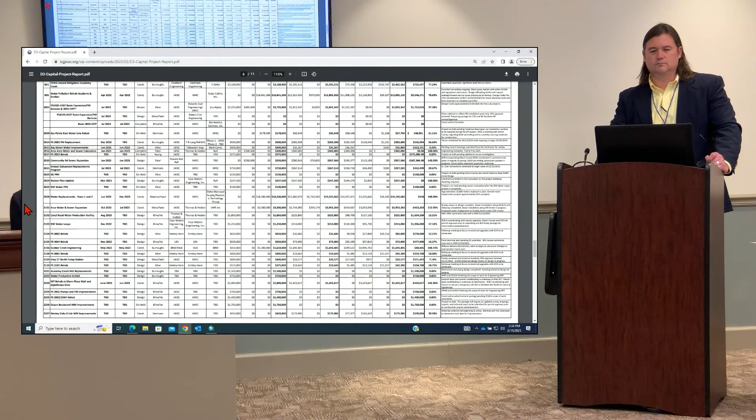When you're just looking at 1,712,653, it kind of blends in, especially when some numbers have decimal points and some don't. So that 275,000 looks like a really big number because it's got two digits behind the decimal. As you're scanning down, you think whoa, that's 27 million, and then realize, no, that's 275,000. If all the numbers were in the same format, get rid of the decimal points at minimum, but maybe even convert it to thousands since most of these are in the millions. It would really make the things that are 20 million stand out more than the 3 million, representing thousands, like our financials. Just my two cents. Certainly.

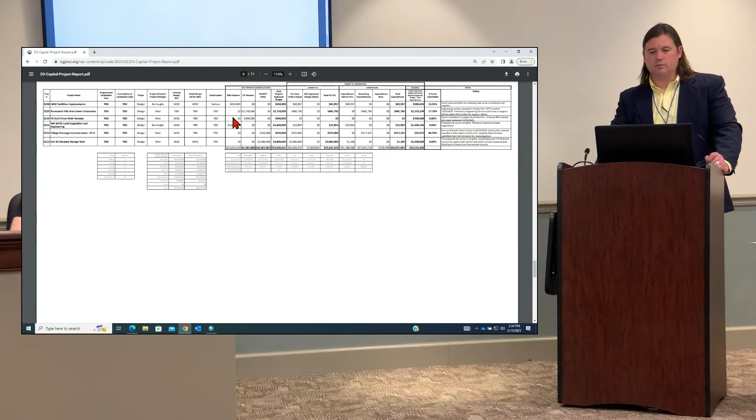Okay, and then we do have the totals down at the bottom. If you want a quick snapshot of how much we have in projects going on at the moment and whatnot, those are down at the very bottom.

You could glimpse there. We also include a Gantt chart that gives estimated schedules for the projects. It's another way to look at the list of projects and whatever phase they're in as well, kind of grouped by that.

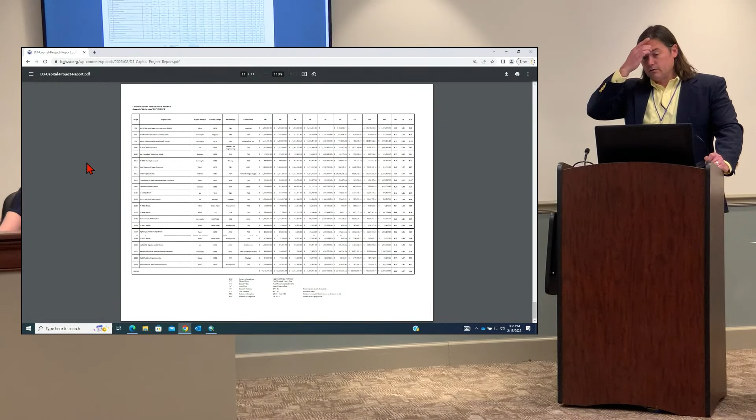And then lastly, we'll include what's called the earned value assessment spreadsheet. Generally, Mr. Burrows will plug in the financials, and what it does is calculate a metric based around a score of 1, showing how we're doing on the project.

So the chairman asked me to go through what all these acronyms are. Starting at the top, you've got your project manager, concept, detail, and who's doing the construction. The BAC is budget at completion, the budget set before the project begins. So if something comes up in the middle and there's a change order, that number does not change.

PV is planned value. This is how the calculation works: planned value is based off of the percentage of contract time used. It's not 100% linear because the engineering contract might be 120 days at $200,000, while the construction contract might be $2 million over 365 days. So it's the percentage of the engineering contract used multiplied by the value of the engineering budget, and the percentage of the construction contract used multiplied by the construction value, for the total planned value.

So you'll see some of them obviously haven't been released for construction yet, and the planned value is very low.

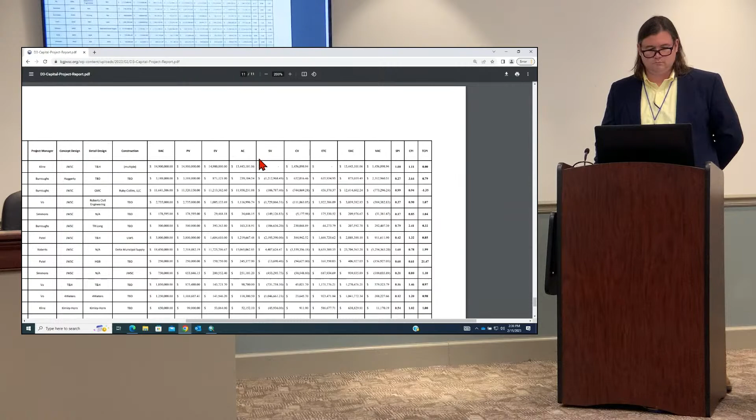Earned value is the estimated amount of work that has actually been completed. So if the project is estimated at 80% complete, the earned value is 80% multiplied by the engineering and construction budget. Actual cost is actual payments to date on the project. Earned value should always be above the actual cost because they bill 30 days, once a month, so they should be doing more work and completing more than what the actual cost reflects.

SV is schedule variance. That is the earned value minus the planned value, or the planned value minus the earned value, whichever way that works. So if the planned value says we should be 75% through the contract, but they've only done 40%, then the schedule is negative because they haven't got as much done as they should have at this point.

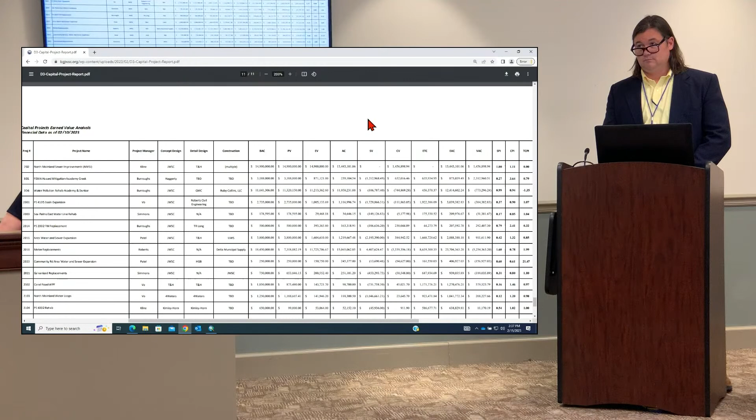Cost variance is the earned value minus the actual cost. Unless there's been change orders to the project, in theory that should always be positive, because we haven't paid out as much as they've actually completed.

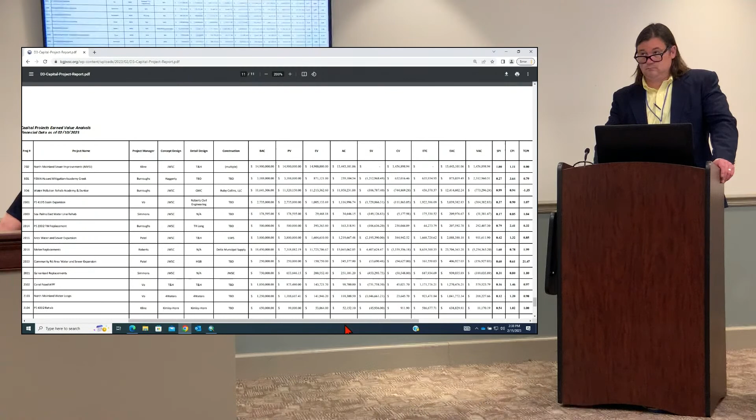So, well, I'm sorry, no, go ahead. What you got? Again, just my two cents, but other than the budget at completion, which you're entering one time, how much time are y'all investing into tracking all these individual numbers?

It's not a considerable amount of time. The project report is a standard report we run out of our financial system that gives us all the cost, and it's just updating what the percentage completion is. You're just plugging numbers in, and everything else calculates by itself. It just seems like there's a lot of detail when really what you want to know is what the budget was and how we're doing.

Right. ETC is estimate to complete, a calculated figure based off the actual cost to date, the budget, and the CPI, which we'll get to in a minute. EAC is estimate at completion, which is actual cost plus the estimate to complete. And variance at completion is again a calculated figure based off of where we're at on expenses to date versus the budget versus what has been completed.

The SPI is the schedule performance index. A 1 means you are on schedule, a number lower than 1 means you are behind schedule, and a number above 1 means you're ahead of schedule. That's based on the schedule set at the beginning of the project. As the project gets closer to completion, it's dollar weighted for schedule, so it will get closer to 1 even if it's 200 days behind schedule, because you've spent the money planned at that point.